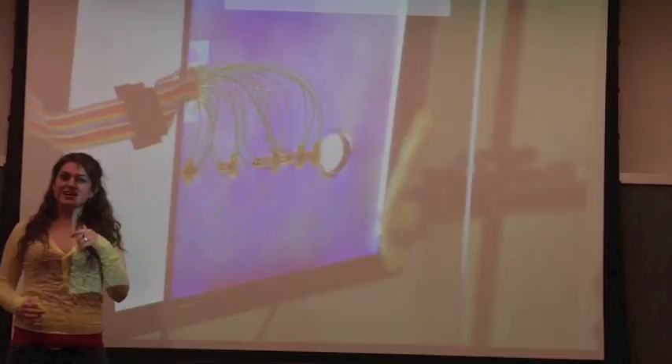Hole in a uniform polycarbonate plate. So, to start off with, we have the setup of the program. In the basement of the LSRM building, we set up this setup, which this right here is the uniform polycarbonate plate. These sensors right here are the stress strain sensors, and we have them oriented vertically and horizontally. This is the hole in the middle of the plate where we're going to be doing most of our analyzing.

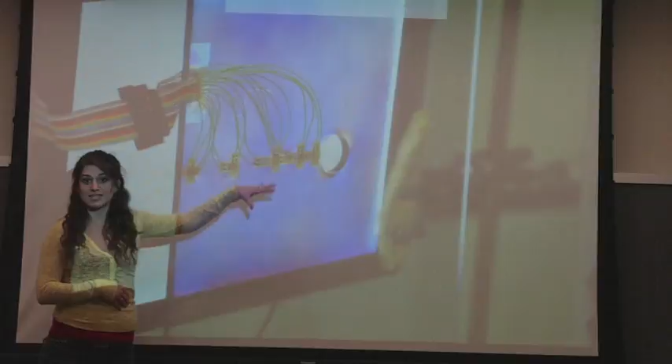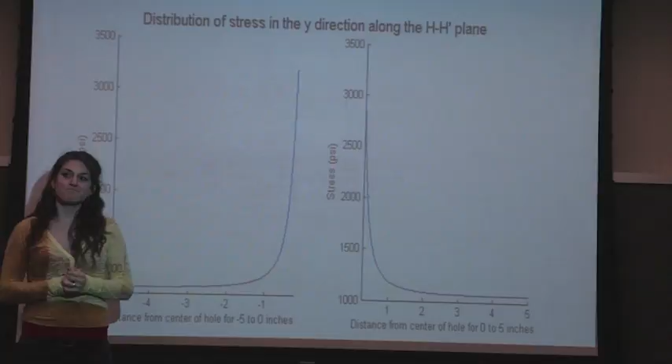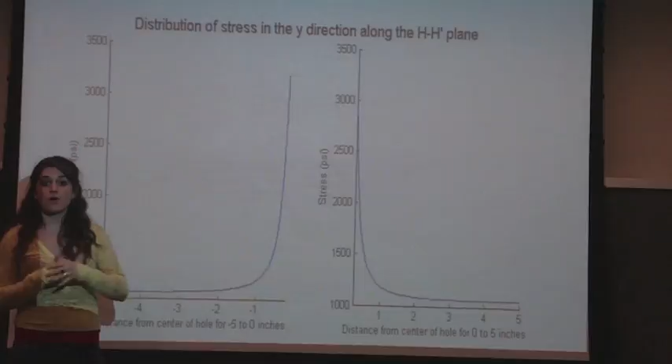So before we did our analysis, we did some predicting for our project. So these are the predicted values of the stress along the hole in the plate. And the graphs you see are concentrated on the y direction over the cross-sectional area of the plate.

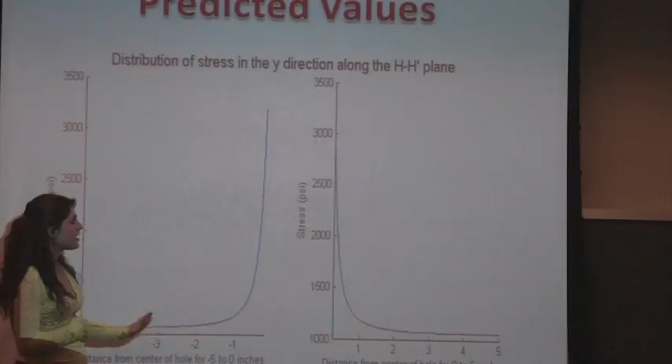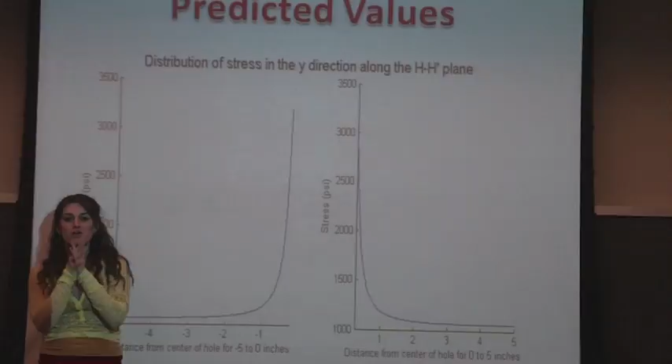So as you can see, as you get further and further away from the center of the hole, which would in effect be right there, you have less and less stress, and then it increases as you get closer and closer to the hole. So this is the bottom half of the plate, and this is the top half of the plate. And these two graphs composite show the overall stress distributions over the center line of the plate.

So next we modeled the plate in SolidWorks to kind of get a feel of what the deformations and the stress concentrations are going to look like. So this is a model of 1/4 of the actual polycarbonate plate tested in the lab. And here is 1/4 of the 1-inch radius hole.

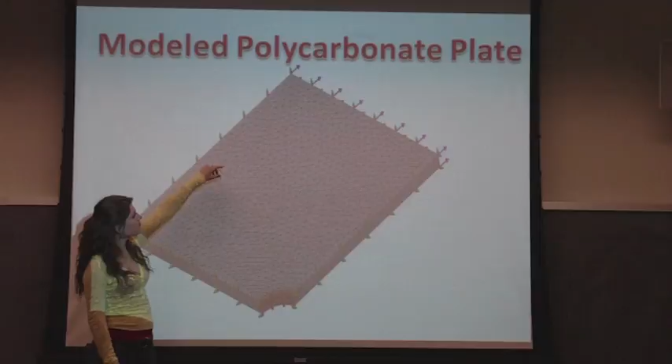And we made a mesh go all over this plate so that you could see the different stress concentrations. The mesh is a lot more fine around the hole because we're expecting there to be more stress concentrations around that section. And then as you move further out, the mesh gets a little more coarse because we don't expect as much stress in those areas.

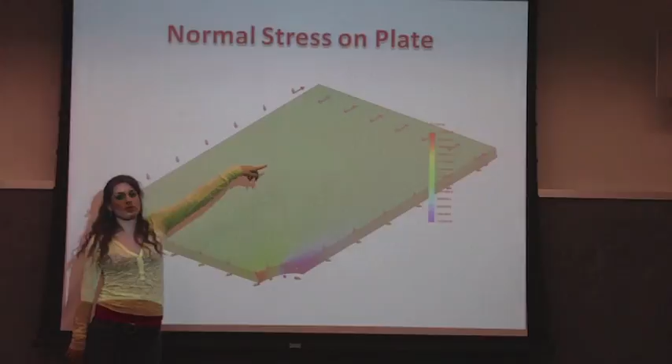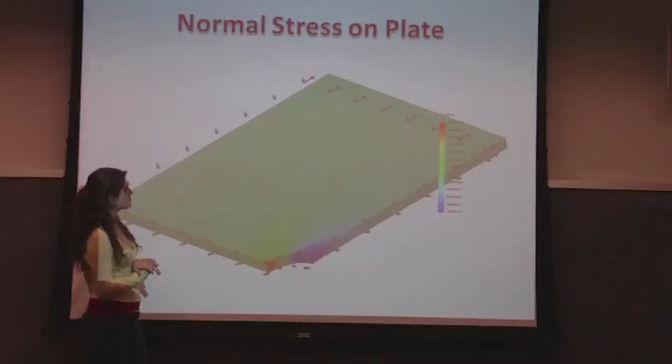And then the large purple arrows in the corner show the force and tension that's stretching the polycarbonate plate. And as you can see, there was some severe deformation that the plate underwent under this simulation. So this is a zoom in of the normal stresses on the plate. So it just gets you a little closer to the hole area where you see the variety of stresses and the higher values, and then shows how quickly they drop off as you go throughout the rest of the plate.

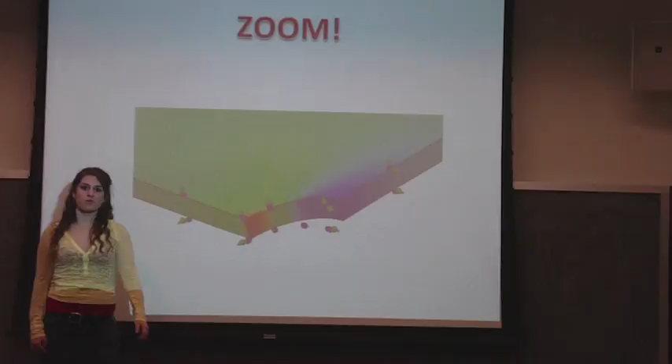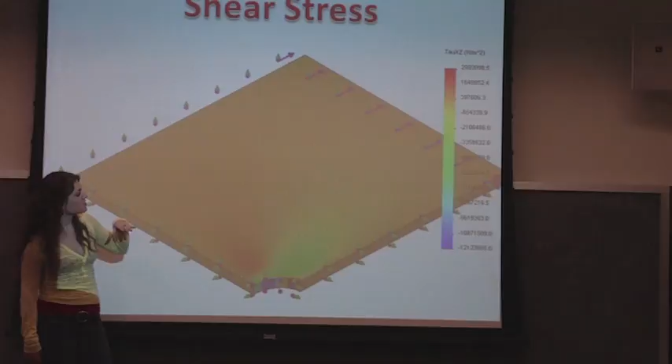Now we look at the shear stress in the plane of the plate. So as expected, again, the higher shear stresses are around the hole, but it has kind of a different distribution with lower overall stress levels. But this shear stress is acting along the XZ plane. And so it's just a different kind of stress, and it's compared with the normal stress in the slide previous.

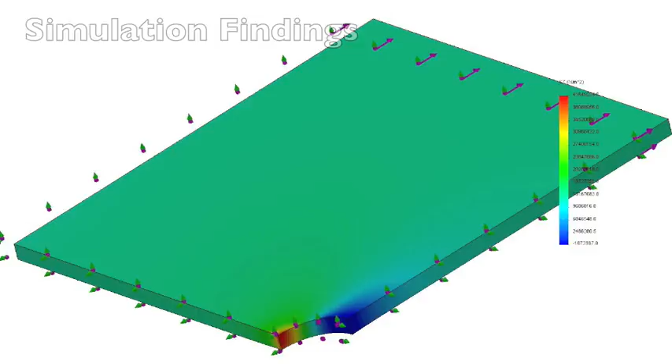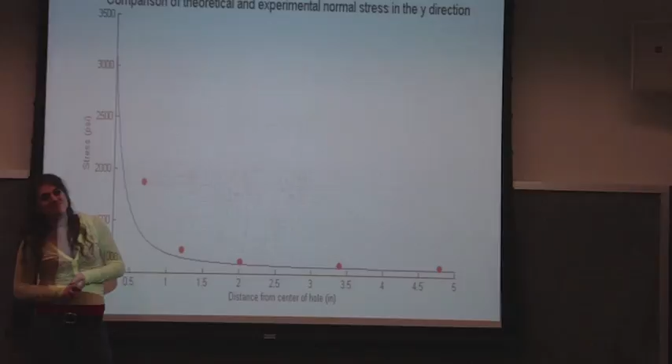Graph of the comparison between the theoretical predicted values of the normal stress in the plate in the y direction with our experimental stress in the y direction. The red dots correspond to the experimental values that correspond with the 5 strain gauges in the vertical direction with increasing distance from the center of the hole.

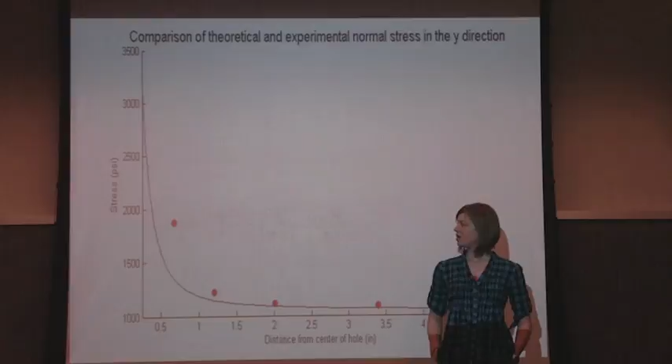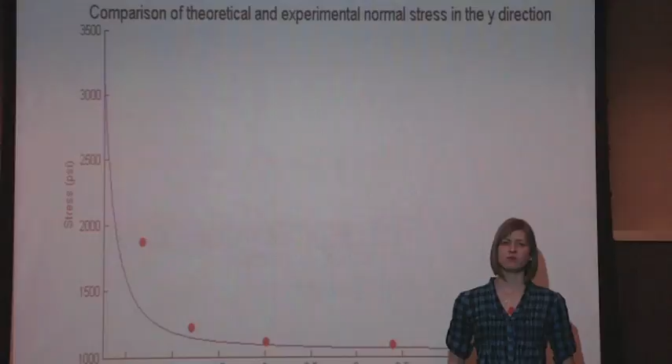The blue line corresponds to the theoretical stress that would have occurred along the HH line of the plate, which goes through the center of the hole, where the maximum stress would occur. As you can see, the experimental data lines up relatively well with the theoretical data, however there are some errors. And here's Jay to explain the errors.

As Tiger Woods has shown us, everyone makes mistakes. And in our comparison between the theoretical and actual values, it's not completely perfect. There could be a couple of reasons for this. The one major reason is that there are a range of values for polycarbonate's Young's modulus and Poisson's ratio, and we had to choose one value to use, but perhaps if we'd changed that within the range, then the graph would fit a lot better.

A couple of other reasons are that SolidWorks did our finite element analysis in an ideal situation, in an ideal environment. And, of course, our actual experiment was in a real-life environment, which would make a major difference.